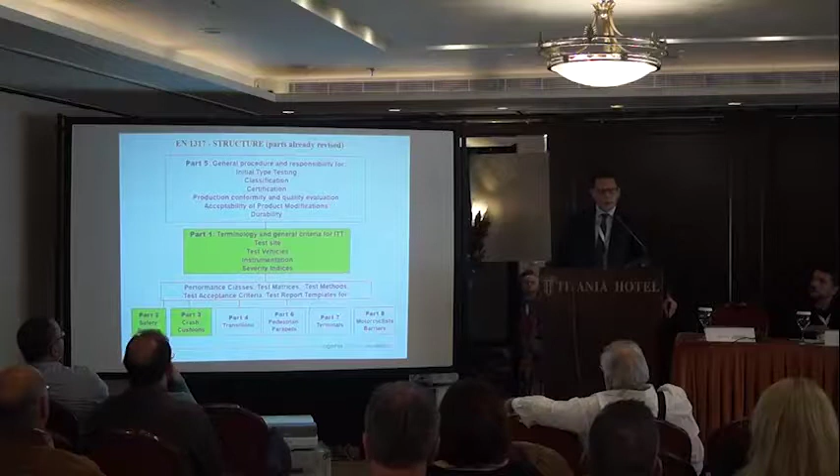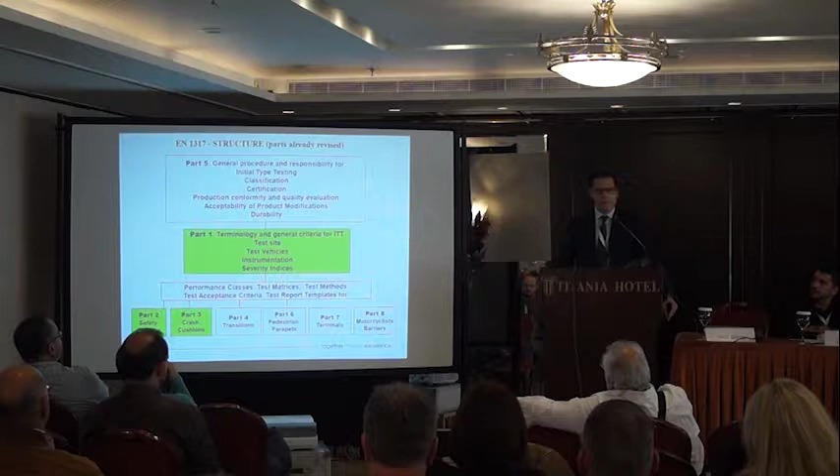While there is still a lot of road hardware not covered by CE certification, even when the standard is present, we keep working to define and improve the standard for a good assessment method. Products such as transitions, terminals, and motorcycle protection systems are still under the umbrella of national homologation.

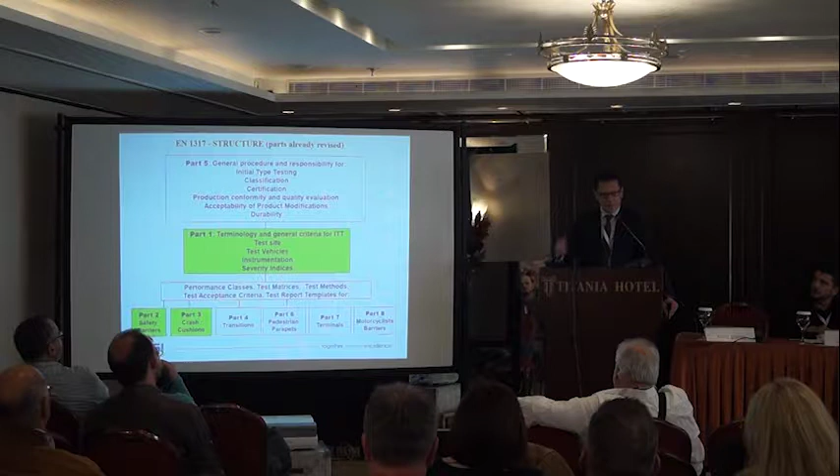It's the national authority that keeps the reference standard, for example EN 1317, to release its own homologation. This is very important: we, in a test laboratory, can assess the product, but not always assess the real crash scenario, which is a different part of road safety engineering.

When we deal with testing, we basically take measurements from the execution of a testing method. That means making sure we have a repeatable and reproducible way of assessing such parameters. So what are the types of vehicle and scenario that we deal with?

According to the classes of the barrier we need to evaluate, we deal with different types of vehicle. A road or side barrier always needs to be tested with two types of crashes. One is TB11 with a 900 kilogram car, meant to evaluate mainly the severity indices - what could be the injury in case of an impact for the occupant of the car, fitting in the car compartment. Then, in respect to the level of containment of the barrier, there's a second test meant to evaluate the barrier's capability to redirect and contain the vehicle.

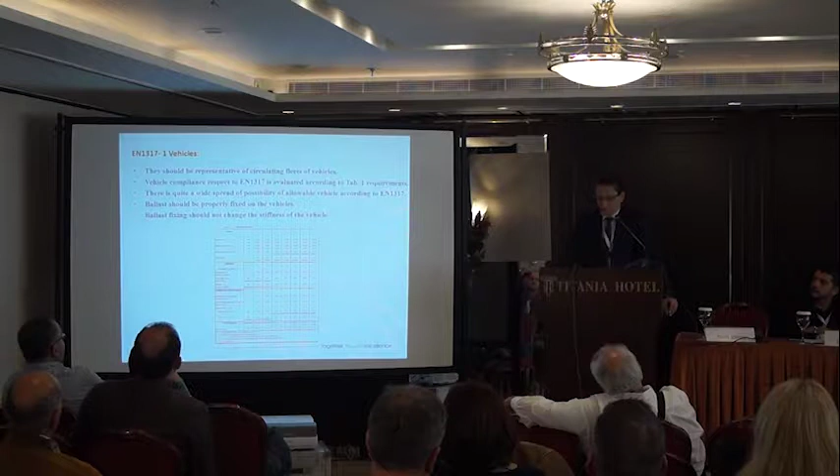This is the so-called high energy impact, done with another type of car, heavier and with more energy, in case of N2, going up through trucks, buses, and articulated trucks, up to the H4 classes, with H4B classes using a 38 ton truck. These are pretty much the types of vehicle involved.

The first one is always present in the test, while the others are differentially used for the different classes of vehicle. It's really important to tell you that the standard we're using is not yet perfect, so you can imagine there's quite a big variety of vehicle that can be employed in our testing standard, and this somehow may affect the result of the test itself.

Nowadays, we believe we have a good compromise between the cost efficiency of this test and the reliability, repeatability, and reproducibility of the measurements we provide. But there is definitely still room for improvement. This is the reason why we keep working in our CEN committee.

What I've just said doesn't deal only with the vehicle selection itself, but also with the way of preparing the vehicle. You can imagine in a test like the last one we saw, the TB81, when you have about 20 tons of ballast provided on the vehicle, the way you secure the ballast to the vehicle may affect both the stiffness of the structure itself and the vehicle dynamics.

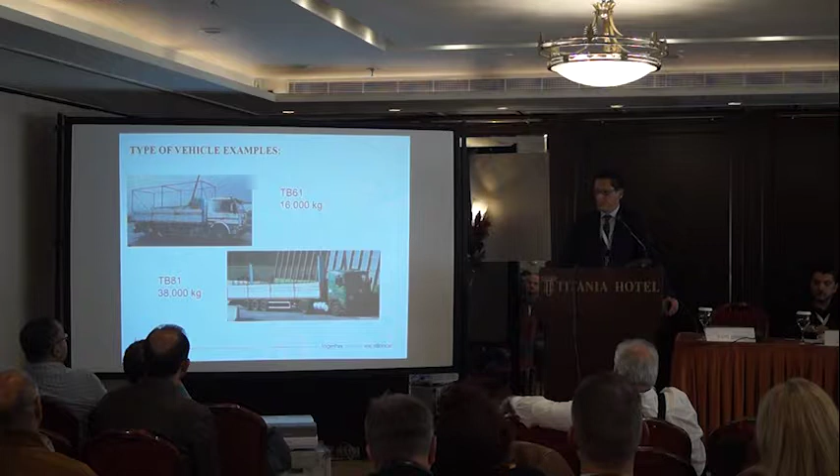This may also have some slight effect on the performance of the barrier itself. These are types of influences and parameters that we are more and more addressing, also with the help of additional tools such as numerical simulation. So we're getting more and more confidence and knowledge about the effect of the different parameters.

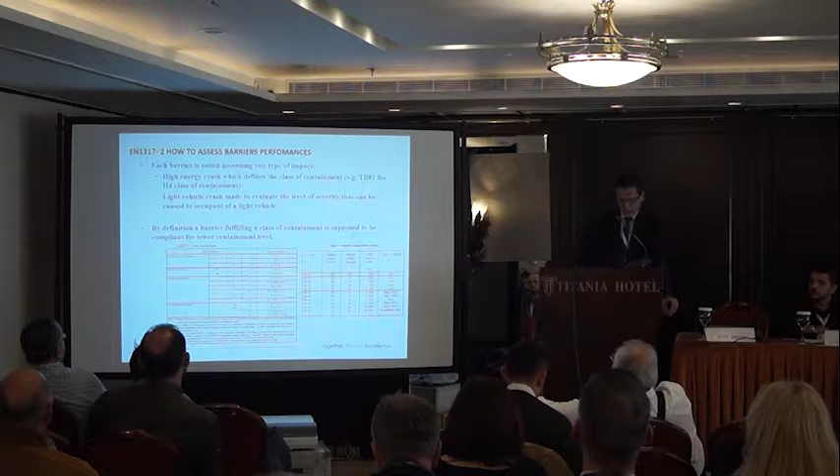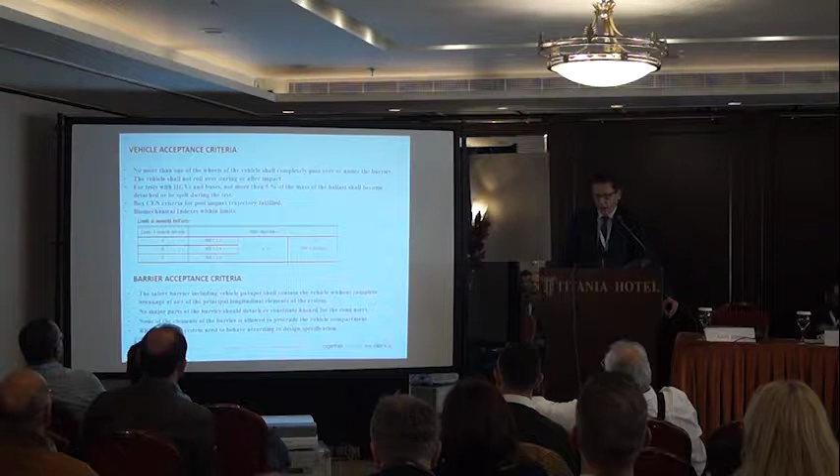As I said before, every barrier is tested with at least two types of impact in regard to the class it belongs to. When we were saying before what are the severity indices parameters that we collect with the car, relating to the injury value of the occupant, we need to clarify that we are not fitting into the car any anthropomorphic test device sensor, as we do in other types of testing, for example vehicle crash testing.

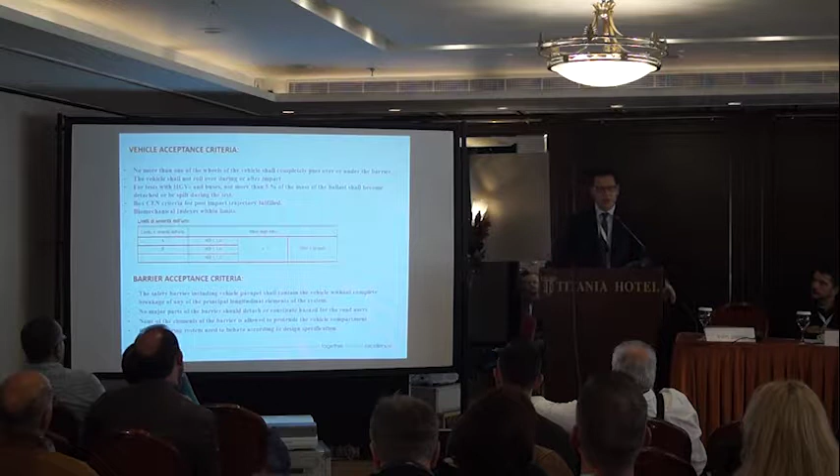Here we have a much more essential numerical model that simplifies the occupant, evaluating the kinematics of this ideal occupant by means of the acceleration and angular velocity read at the center of gravity of the vehicle.

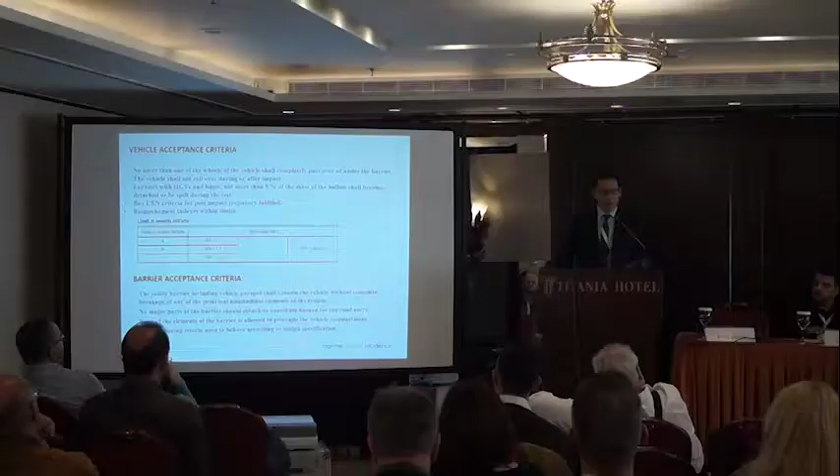This is one of the well-known approximations and assumptions we use when evaluating ASI, which is an acceleration parameter, and THIV, the theoretical head impact velocity, which is the theoretical velocity at which the theoretical model head impacts the inner part of the vehicle body. So it has nothing to do with the real capability of a vehicle to restrain the body and mitigate the forces coming into the human body. But we believe that for this type of application, this is still the best way of having an indicator that allows products to be compared without excessive complexity. So nowadays, this is the best option we have. We'll see what happens in the future, but for now this is really important to point out.

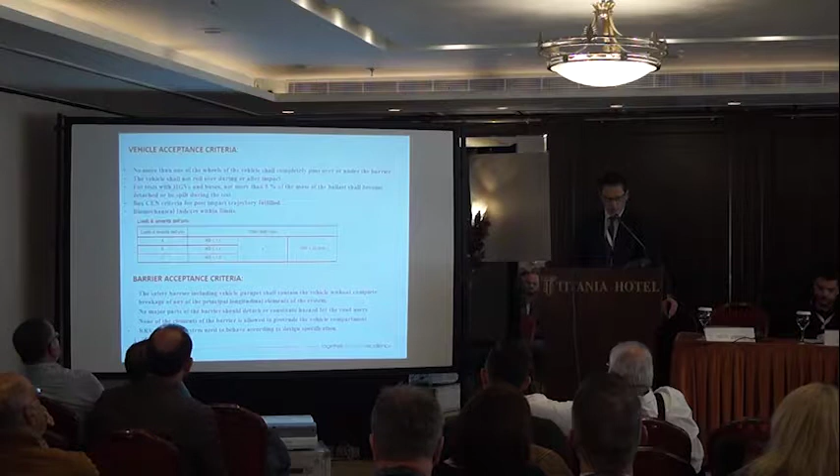When we run a crash test, besides these parameters, we also need to assess the proper behavior of the barrier itself while interacting with the vehicle. It should safely redirect the vehicle, should not break it, and should not let the vehicle protrude during redirection. We also have numerical parameters to evaluate on the barrier dealing with the geometrical and dynamic deformation of the vehicle and barrier, and the maximum displacement, working dynamic deflection. There's also a parameter for the maximum displacement of the vehicle while working on the barrier, in order to select the proper installation point relative to obstacles that may be present around it.

This is just a quick look at how we run tests at CSI. We have built a remote control system that allows us to very flexibly remotely drive any type of vehicle. We have different impact areas so we can impact the barrier.

Oops, wow. Excuse me, I was trying to use this.

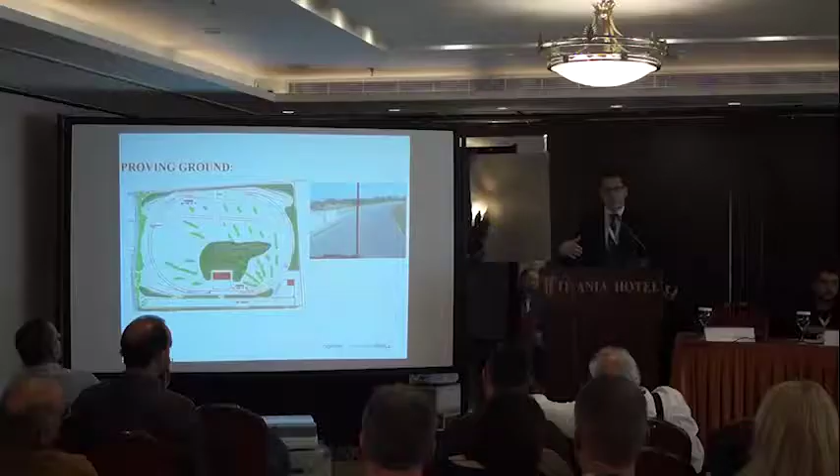We have many impact areas - one here, one here, one here - where we can install 110 meters of barrier in order to test safety barriers. We can test terminals here, and we can test crash cushions on different types of foundation - soil, asphalt, concrete. With this procedure, since we are not pulling the vehicle but driving it wherever we like, we are very flexible in running tests under different conditions and impact points on the same system, without making new installations. This also allows us to carry out research activity, changing the direction and impact point quite flexibly.

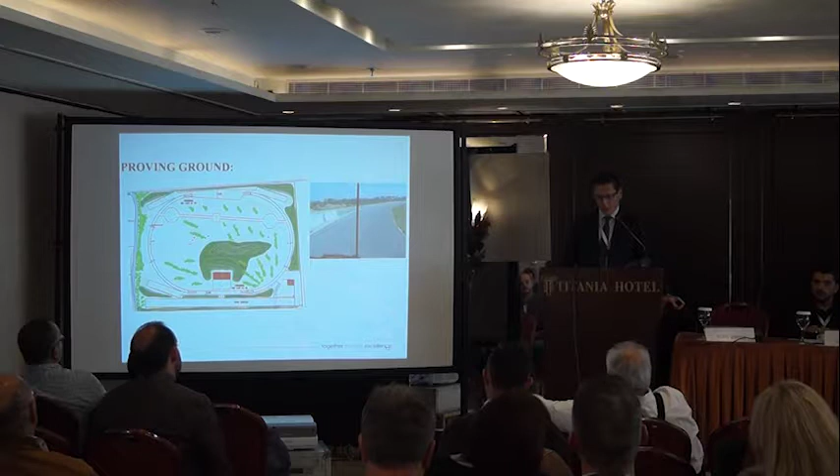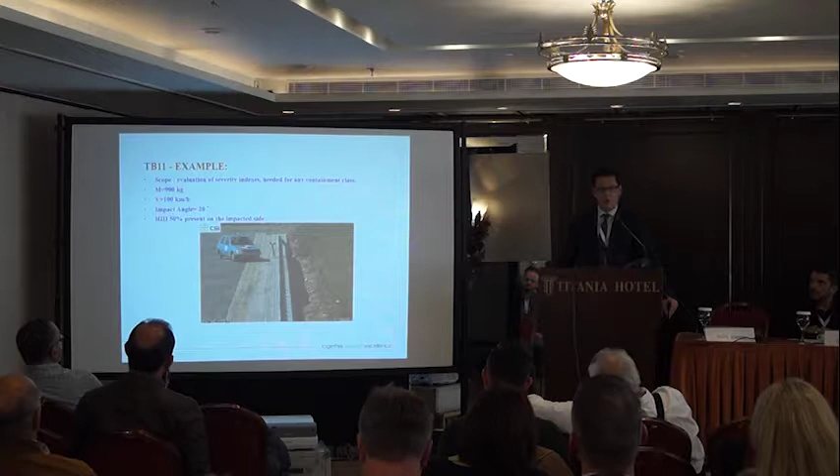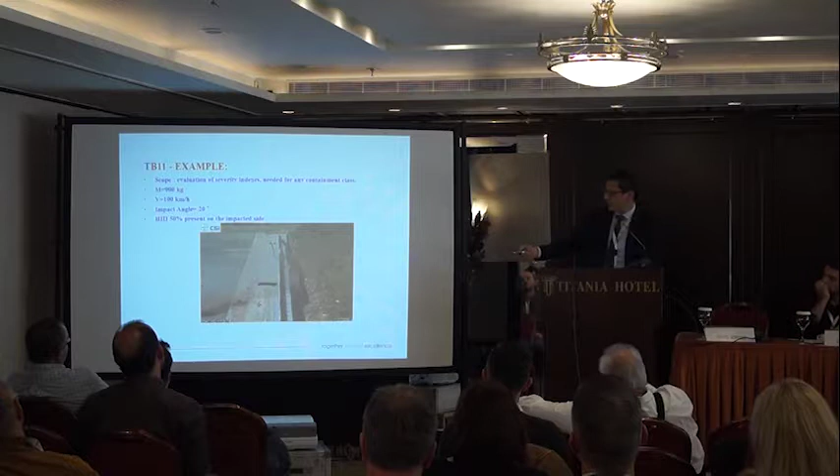As you can see here, we also simulate the free space behind the deck, in order to make sure there is a proper interaction between the vehicle and the bridge deck, and the vehicle is free to see the void after the barrier in case of large deformation, let's say.

While this is another type of application, a soil installation for an N2 system. As you can see, this is a typical way of behaving of a barrier with post and rail disconnection. Very smooth redirection of the vehicle into the road. If you have enough working width available, this is a very forgiving system.

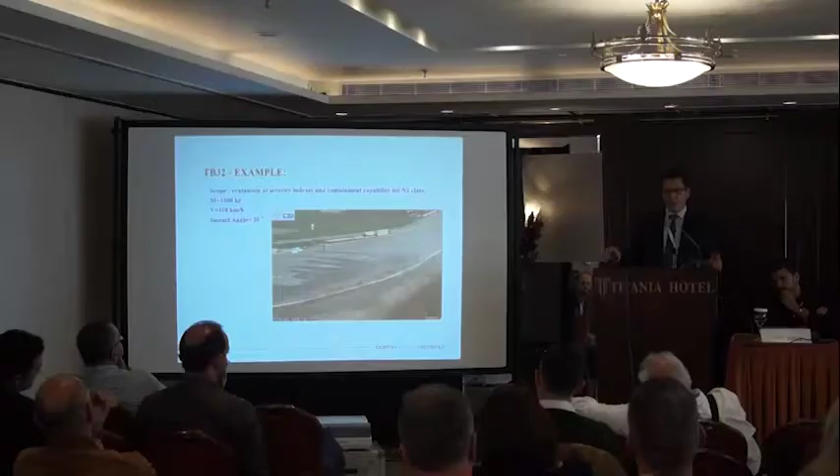When you run testing on this type of system, in regard to the foundation, you need to be very careful about the way you provide the soil characteristics to the barrier, because it's very relevant that the crash laboratory provides to the manufacturer a set of information related to the stiffness of the foundation where the barrier was tested. What we do is assess the product providing a parameter, but this parameter depends on the foundation where the system was tested. So if you take the same system tested on a hard soil, and then install it on a vegetable soil, the performance may be dramatically different.

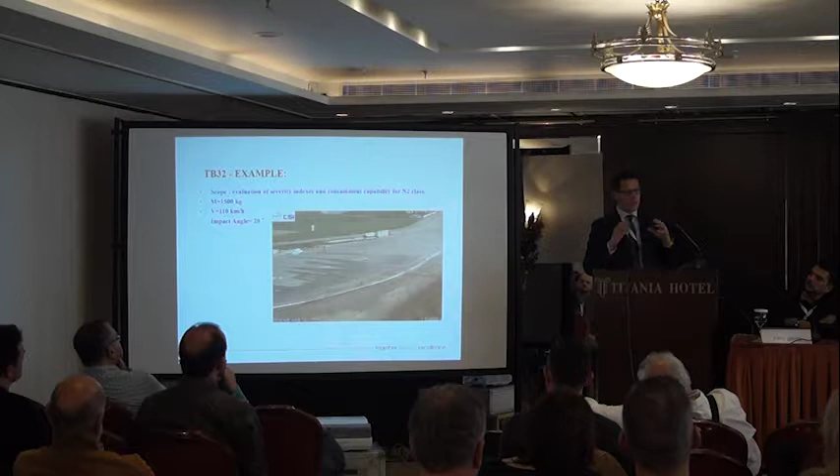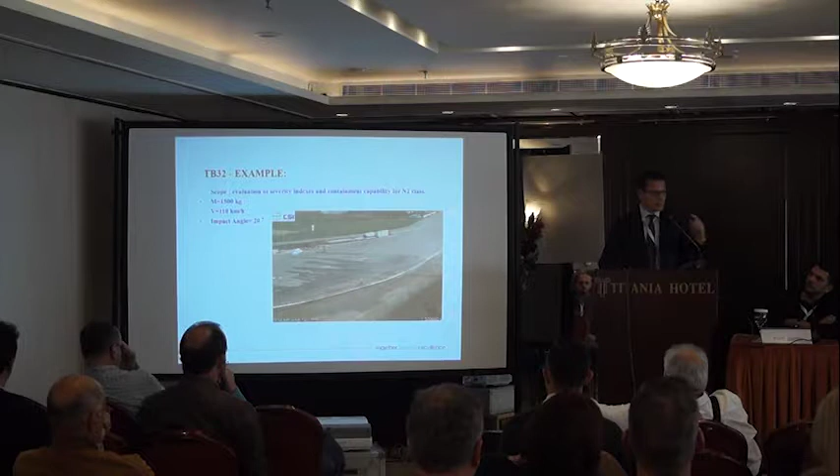So it's very relevant that when the manufacturer gets to the real road and works on a project, they provide information about the performance related to the proper condition where this parameter was measured, in order to make sure you can have a similar condition on your project itself.

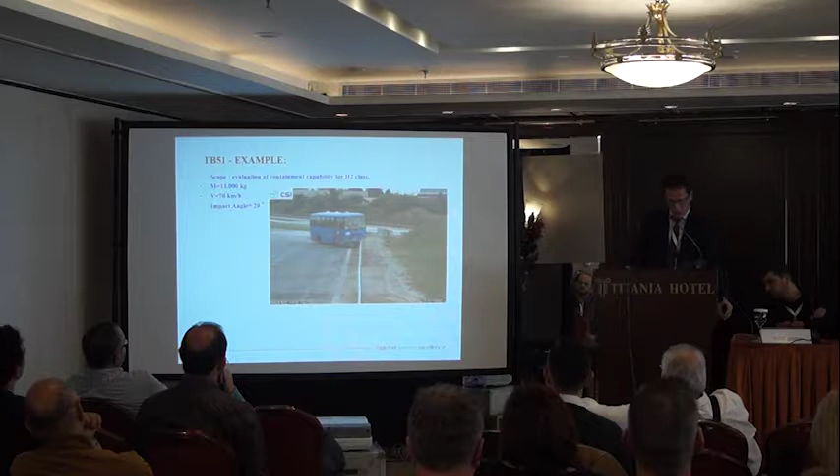So I just wanted to show you a similar test with the bus. Now, as we said before, not always the tests are successful, so this is clearly what the barrier should not do in terms of containment.

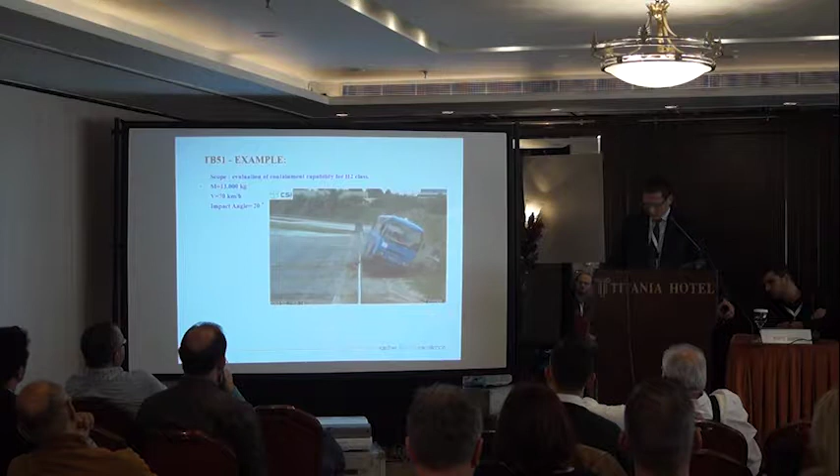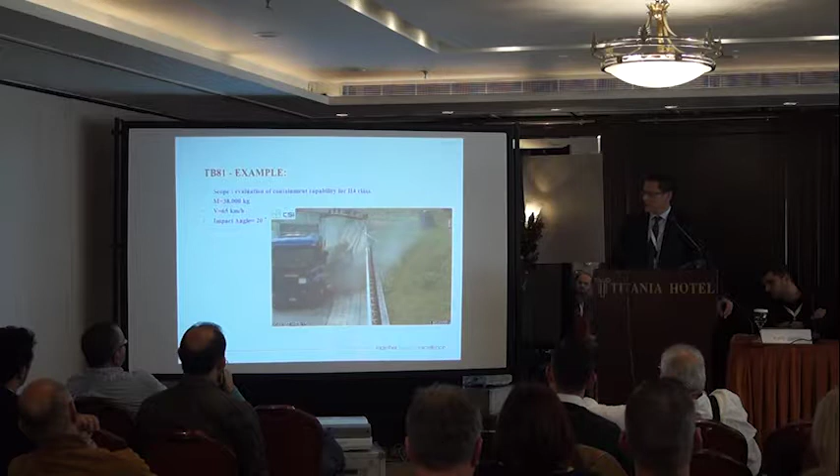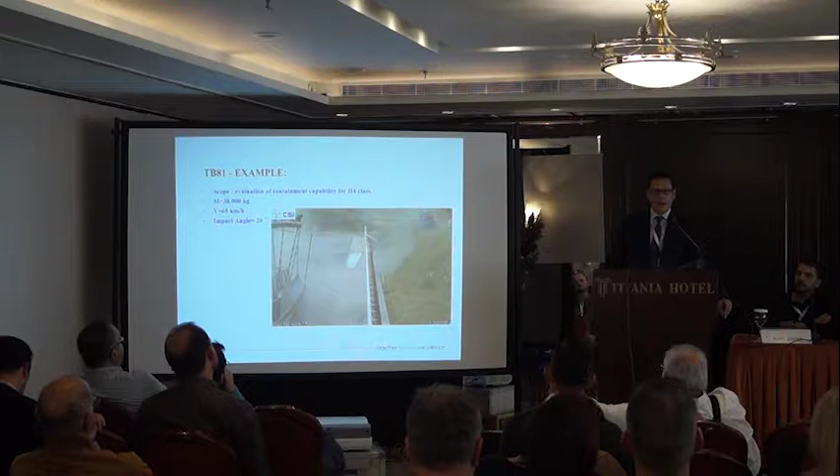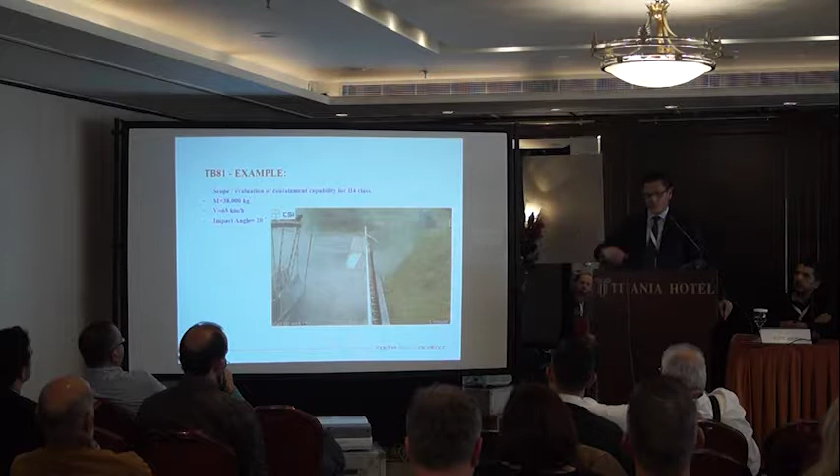And the last example I have related to side barrier testing is an H4B type of testing, which is the maximum level of energy we test according to EN 1317. Actually, as an exercise, 3 years ago we made a so-called H5 type of test, with a 44 ton vehicle at 75 kilometers per hour. We ran it in CSI because it was quite easy to do with this technology.

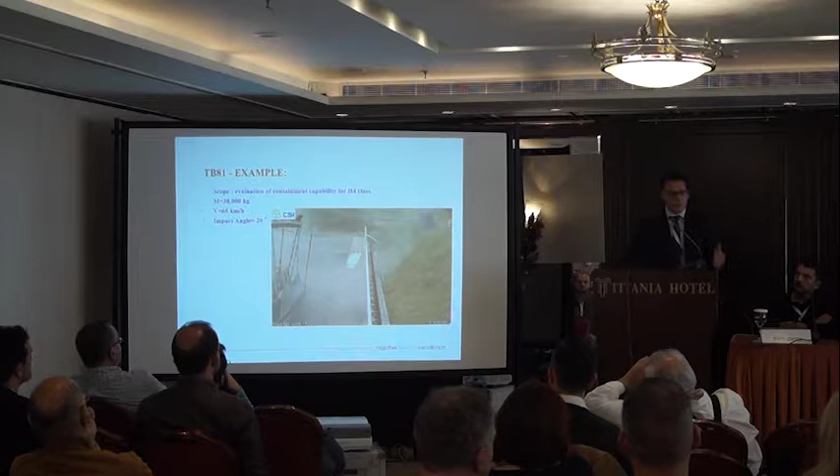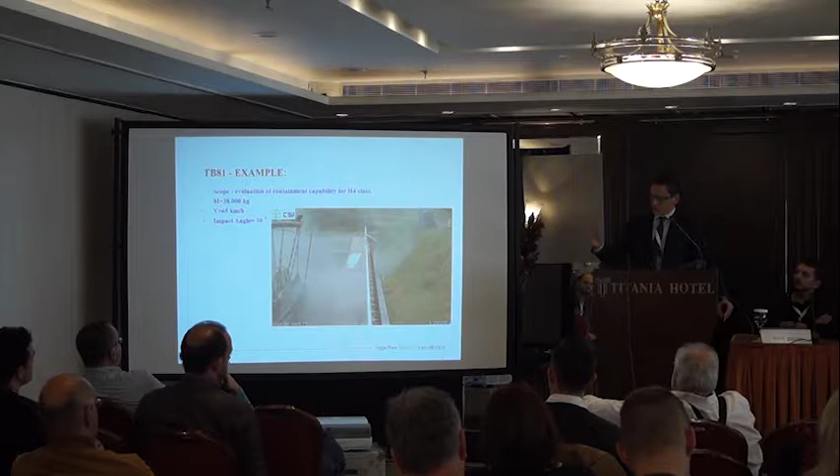The first feeling we had is that the type of system, even stiff systems that we currently have for H4, are not still sufficient to keep this type of energy. But this is going to be maybe a future requirement, it's still under evaluation. The need came from the fact that on certain European roads now the trucks become more and more heavy, so 38 tons sometimes is not enough to be representative of what we have on the road.

Again, just a quick overview of what happened for crash cushions. Everybody knows what crash cushions are, which have a big difference with respect to the side barrier because they are meant to absorb energy instead of mainly redirecting the vehicle into the road. So absorbing energy in order to protect obstacles such as piles, poles, payment tolls, okay?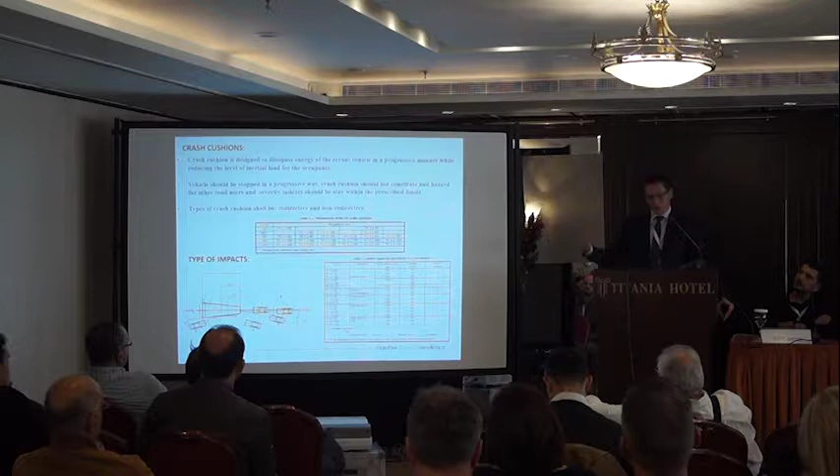Then you test them according to frontal impact with offset, frontal impact centered with an angle, side impact for those that need to be redirective, and also back impact. The back impact mainly is meant to evaluate that in case of upcoming traffic from the opposite side, the crash cushion does not constitute an obstacle.

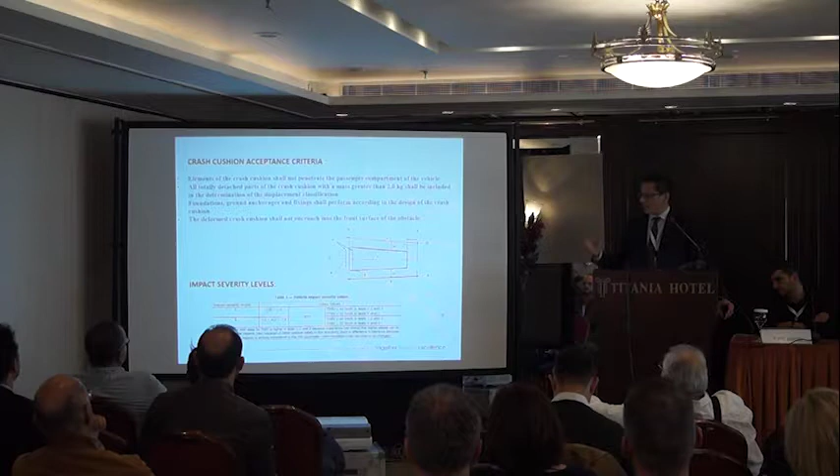Again, even here we have similar parameters to evaluate the behavior of the system that should not constitute a hazard, needs to have a proper foundation according to design specification. And again, you also evaluate parameters related to the severity indexes on the occupant of the vehicle.

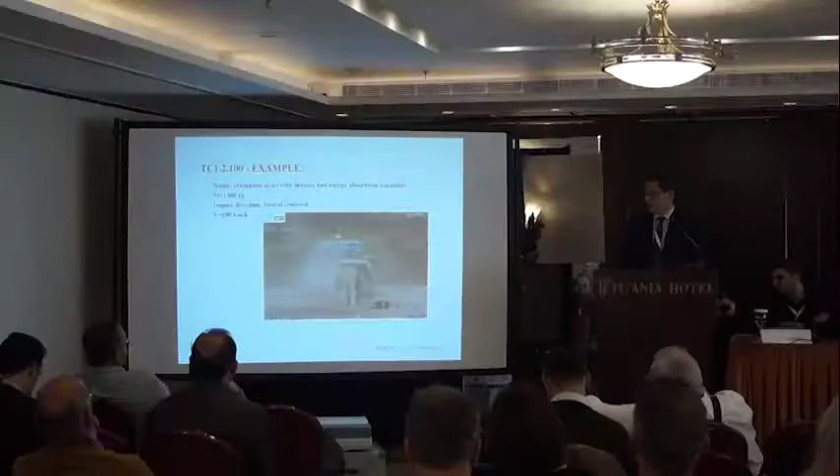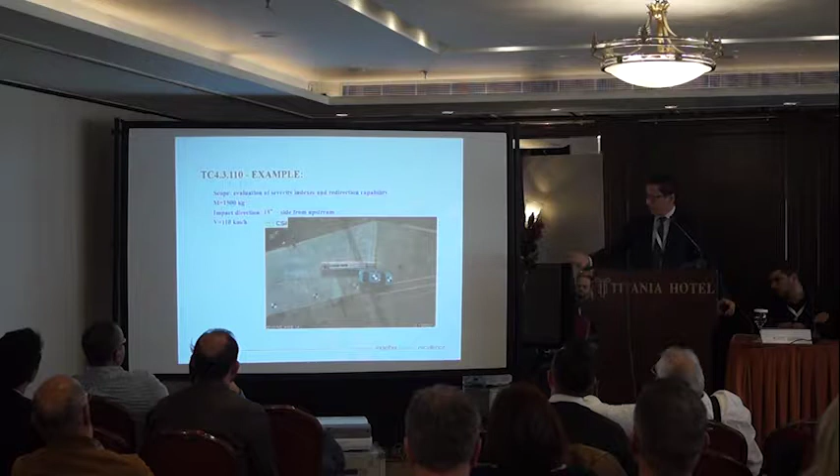So we were saying absorbing energy, this is what I meant for absorbing energy. The vehicle is stopped, and in this way the system provides a crash-worthy force on the vehicle. So you need to have space in order to mitigate the deceleration and stop the vehicle, while saving the life of the occupant of the car and protecting the obstacle that lies behind the crash cushion itself. And as we said, they work for protecting frontal crashes, but they also are supposed to redirect the car in case of lateral impact.

So, provided that this is what we do in terms of testing, very briefly, let's say what comes next in terms of certification process.

In terms of certification process, in regard to side barrier and crash cushion, as we said before, we can currently provide CE certification to the product, since we have a harmonized standard, and because we have been notified by one of the ministries of the European Union.

This means that the job we do in terms of notified body is to run the factory production control and audits to the manufacturer, in order to make sure that they have a quality system in place and they produce the system with the sufficient level of quality, and they are capable to keep the performance of the system while they are producing it.

The type of performance they need to ensure are the performance shown during the crash test, the initial type testing report, which are definitely correlated with the material analysis - the qualification of the material employed into the product - that are very relevant and need to be kept along the complete life and production cycle of the system.

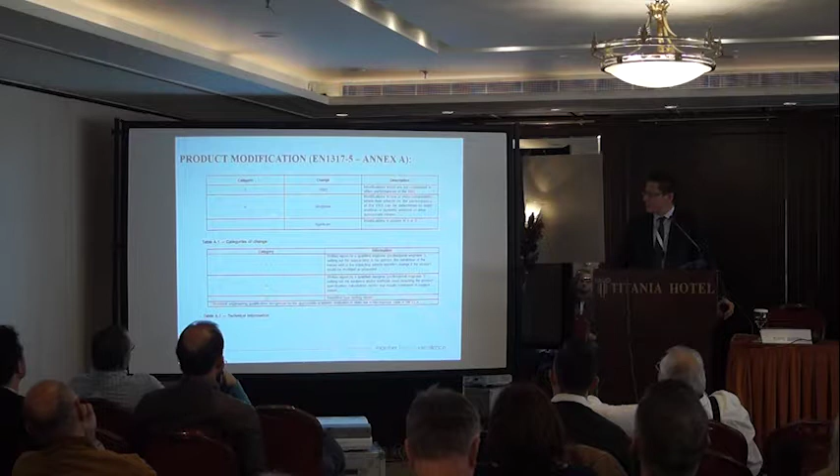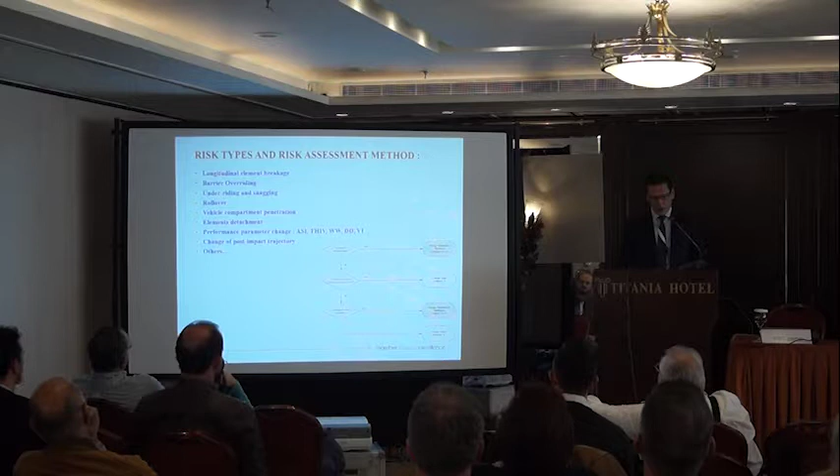We basically evaluate three categories of modification for the product, which are A, B, and C modification. And according to the level of modification, we need to have different assessment of the impact of this modification on the product performance.

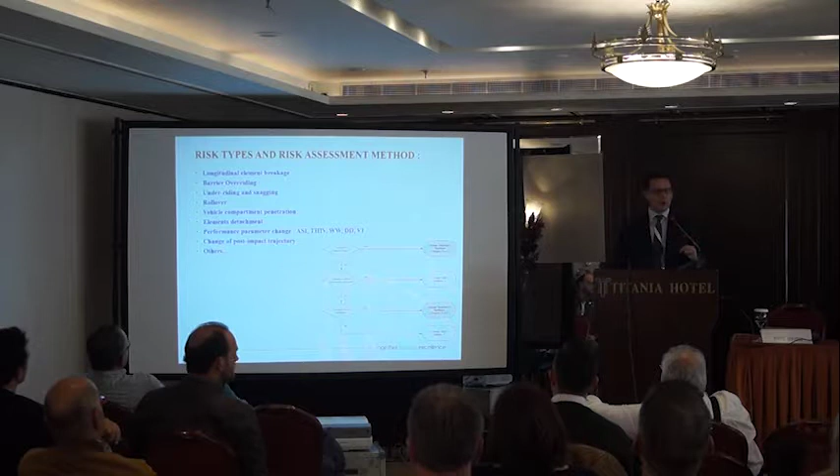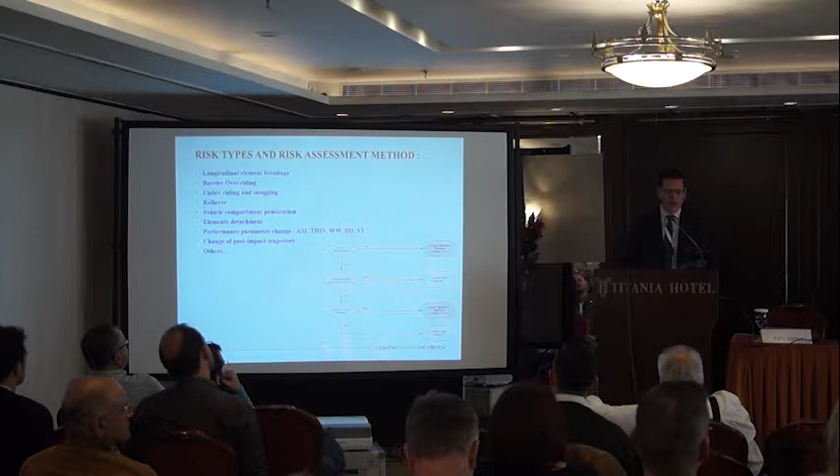What is really important to keep in mind when we evaluate a product modification is that the main goal is to prove the constancy of the performance. Because if the performance changes in terms of working width, dynamic deflection, biomechanical index, this becomes another product. So when we evaluate a product modification, our task is to make sure that the performance are kept constant.

So we can evaluate three types of modification in order to have different types of assessment. For type A modification, which is a very simple modification, we will simply have a description of the modification, because after we run a risk assessment, we evaluate that the modification has so small an impact that it does not require a deep dive on the evaluation.

While if you have type B modification, you will need to have partial testing, or it is also allowed in EN 1317 to run evaluation with numerical assessment, only for type B modification. And it has to be done very carefully, because the numerical simulation needs to be treated only if...

...the designer can prove that the model is very well correlated, and the notified body can treat it only if he has the competence to evaluate the numerical simulation. In EN 1317 we specify how to provide proof of proper correlation of a numerical model, and this applies only to type B modification.

So when the modification is considered, after a risk assessment, to be significantly relevant but not crucial for the change of performance of the product - because in case the modification is considered to be at a high level of relevancy, it becomes a type C modification, and a full vehicle crash test is mandatory at that time.

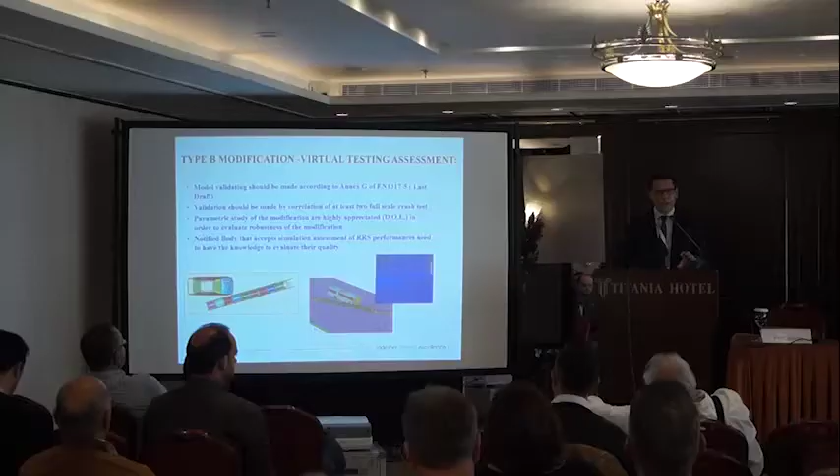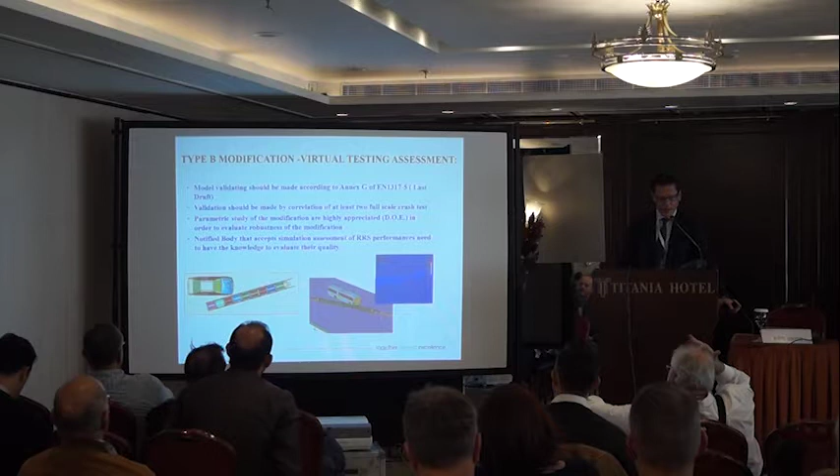So the model needs to be validated, and in the working group we have in CEN TC226, we have a specific working group that deals with numerical analysis, and they have provided a continuously improving, and currently I would say good, set of specifications and methodology to evaluate the accuracy of the numerical model. So in EN 1317 Part 5, it is currently defined how to assess a numerical model.

So very basically, when you assess the modification of a product, you have the crash test for that product.

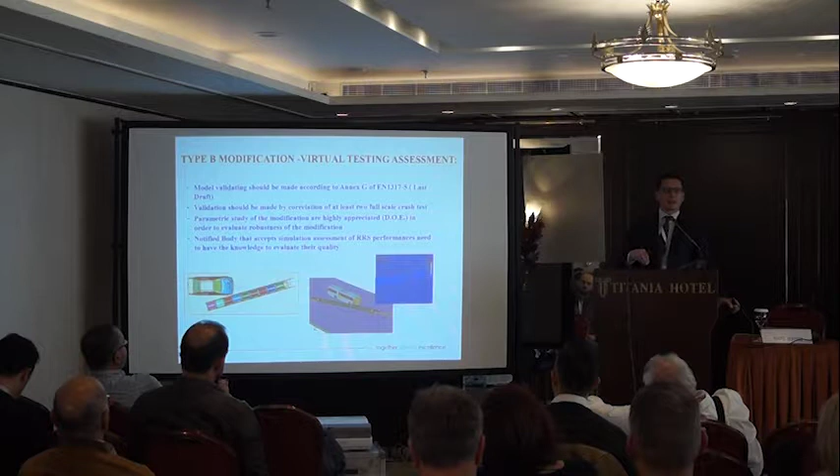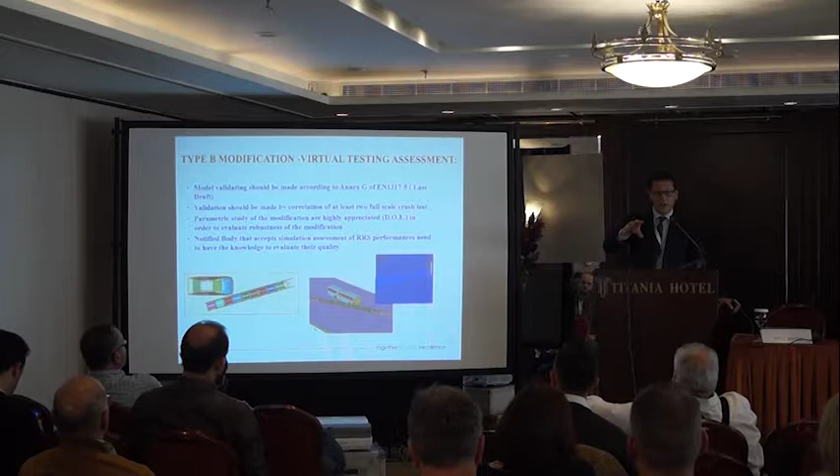So, first step is that the numerical simulation needs to be capable to reproduce the same result that the crash tests have shown. From that moment on, you can work with that model to evaluate the modification itself.

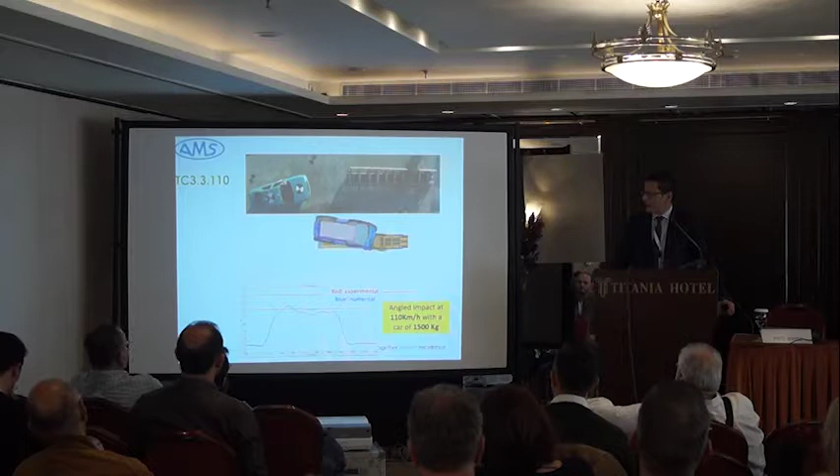Currently, the technology we have with the finite element method is quite accurate, but the phenomena we evaluate are highly nonlinear and dynamic. The system may have a specific behavior, so it needs to be very carefully evaluated.

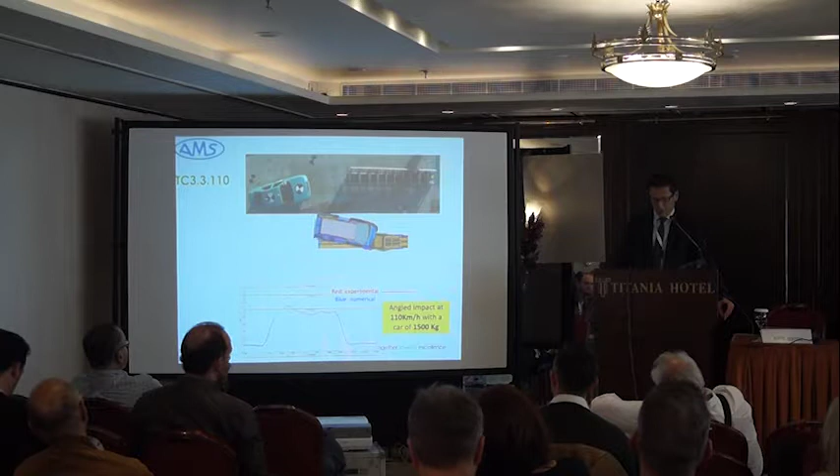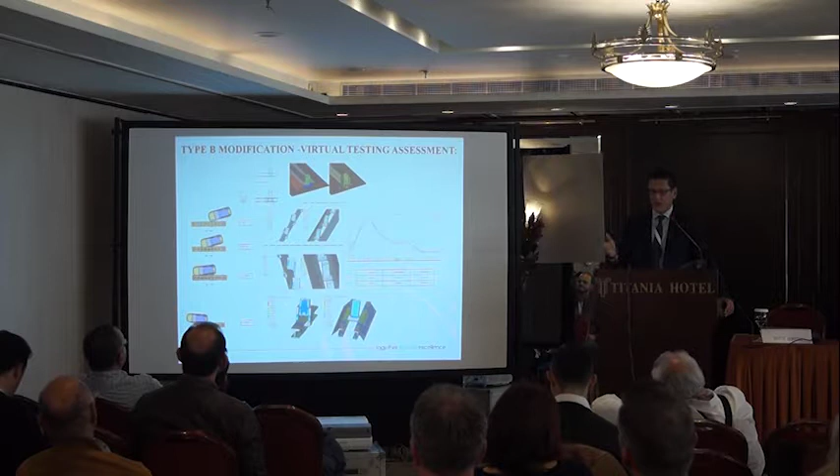The numerical simulation is also very helpful for evaluating the modification, or running assessments in terms of parameter change. So as soon as the modification has been proved to keep the constancy of performance, the new modified product can be included in the family of products that have been granted with the CE certificate.

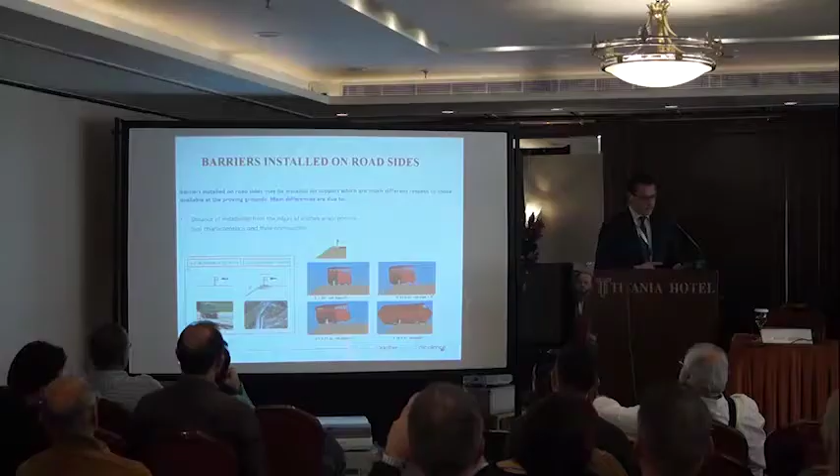Let me be very brief with the last topic I have for today, which deals with installation. We apply EN1317 as a standard to evaluate the performance, but we - the road designer, the barrier manufacturer, the authority, the ministry - need to be very careful that the system has been tested in a condition relevant to what you install on the road.

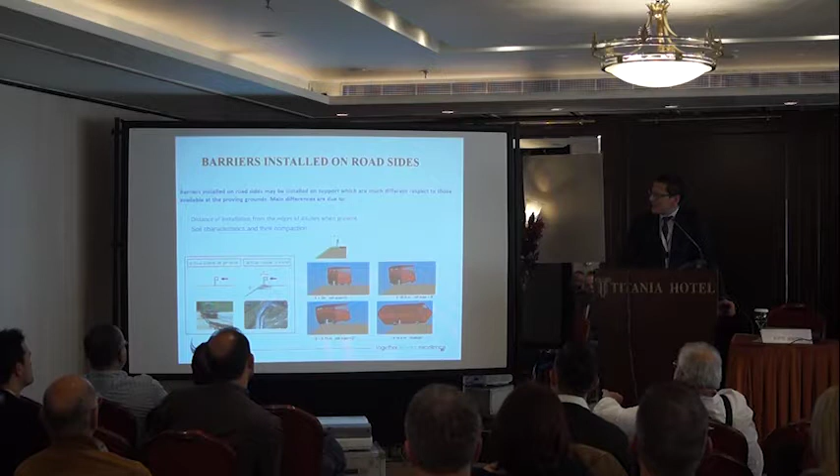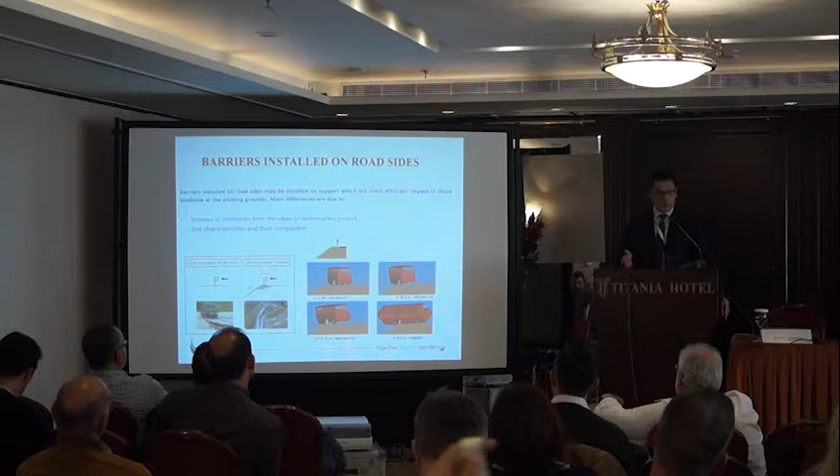Let's take a look at what happens for the installation of a barrier on soil, and what may be the main differences compared to the crash test. Basically, the main differences between a barrier installed on the proving ground and on the road are the distance of the installation from the edge of a ditch, in case the ditch is present, and the soil characteristics in terms of compaction.

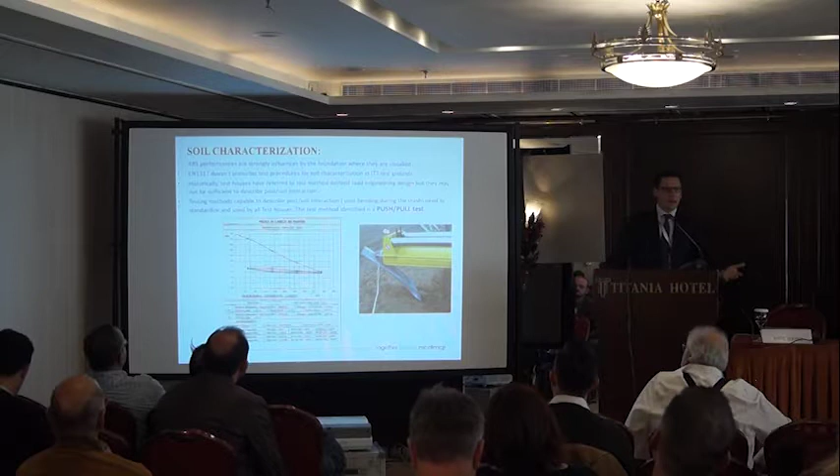How do we assess the compaction of the soil? This has been a long-treated argument, and I believe we've now come to a reasonable conclusion. Until a few years ago, we had been defining the soil characteristics in a way very similar to what the road designer does. This doesn't pay off very much when you have to assess the behavior of a beam that is dynamically bending in a volume of soil. So we had to conceive a new way of assessing the performance of the soil.

This means not only evaluating the stiffness, the compaction, but also running dynamic testing, push-pull testing on the post itself. Let me show you what I mean by that.

So this is the type of testing I'm talking about. We have a specific hammer that knocks the post, loading it during its real installation. You can even test a very rigid bar, such as an HEB, a very stiff post like this one, in order to compare the stiffness of different soils using the same post. But you can also test the specific post of your barrier in the same soil, to evaluate how that post behaves in that soil.

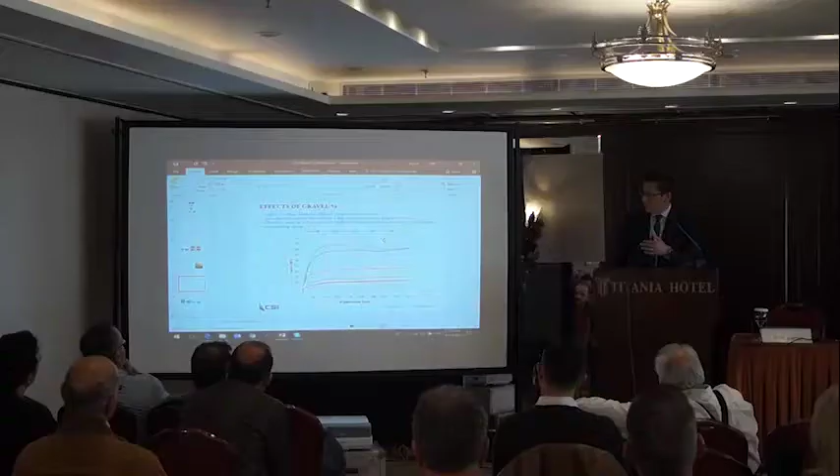So at a certain stage the stiffness drops because, for this type of gravel dimension, you have too many voids in the soil, which reduces the stiffness of the volume itself with respect to the push-pull test.

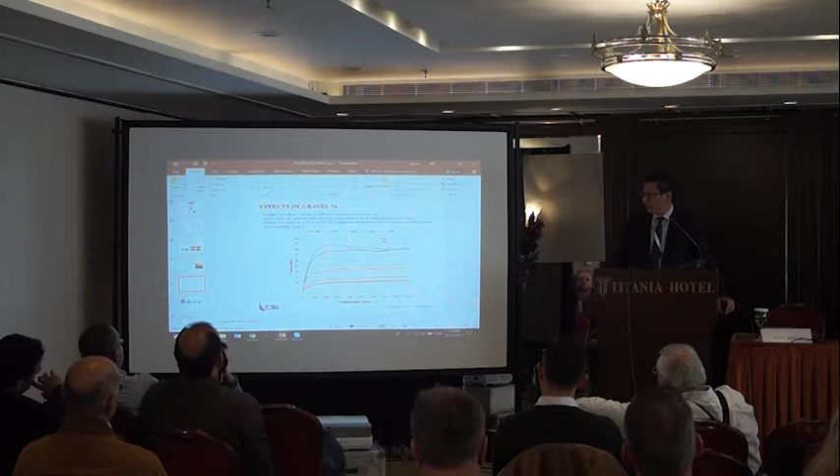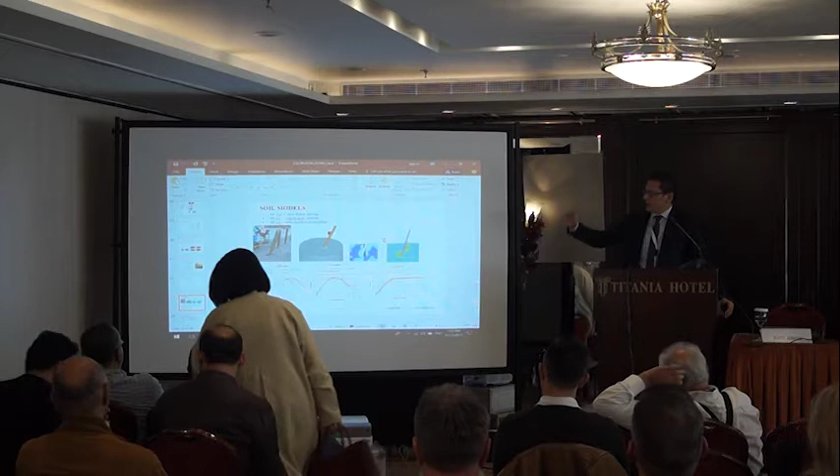There are different models to simulate soil behavior, which is quite complex, that have been recently introduced. Some are numerically more efficient, such as a one-dimensional model using nonlinear springs that keep all the parameters such as moisture, depth of position, and so on. Or you have more complicated three-dimensional models that deal with the soil considered as a solid or as a fluid. So this is simply to say that the level of knowledge with respect to numerical modeling of the soil today is quite high, and we can provide quite good correlation with the push-pull test itself.

So just two slides to the end. What we are going to introduce in the new EN 1317 standard—I'm talking about the draft, because for political reasons it was not yet finalized and voted—but what we expect, after the job we have done, to be included in the next approved standard is the definition of a push-pull test that first of all defines the constitution of the soil itself.

There are going to be four types of foundation defined: standard soil, fine soil, special soil, or paved soil, that need to be defined for that specific initial type test.

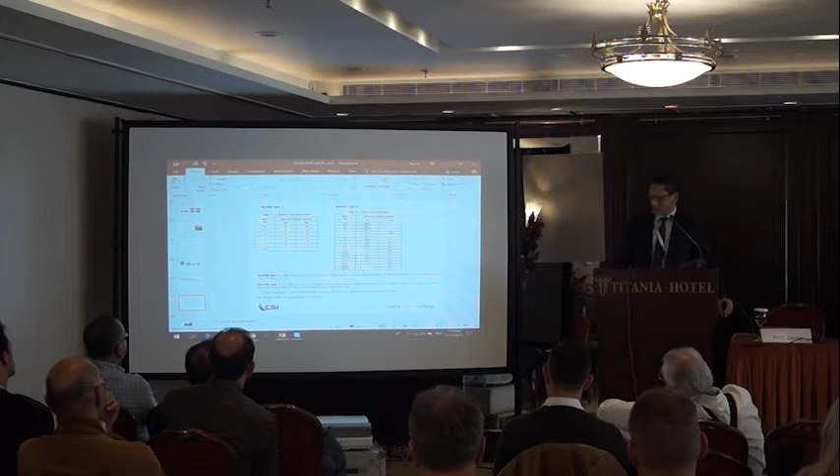The soil in the proving ground needs to be prepared in a standardized fashion. In fact, we prescribe that the soil is compacted in layers of 30 centimeters as soon as you have defined the constitution of the soil itself. This is simply to provide the characteristics in terms of mixture of the different types of soil.

And then you need to run a push-pull test with a stiff beam, as I said before, and acquire the time history of force versus displacement. With this type of plot, you have the best characterization of the stiffness of your foundation.

Together with that, you have the parameter that defines the barrier behavior, and then you can go to the installation asking for similar soil to install the system, in order to ensure that you will have a similar result to what you acquired during the ITT.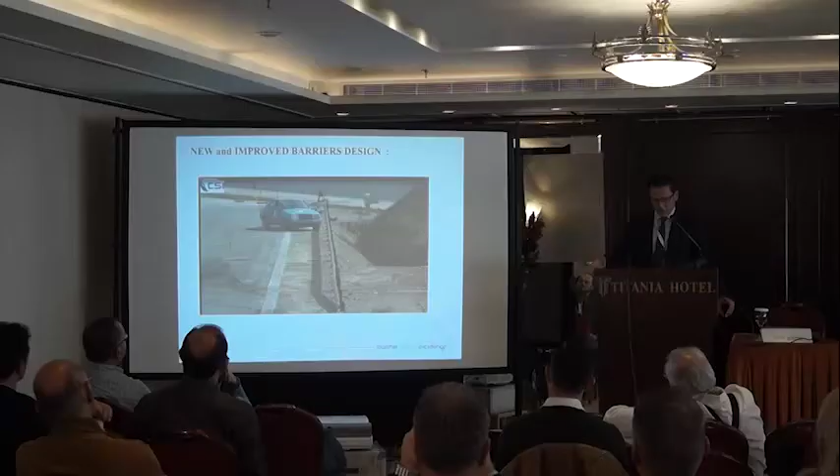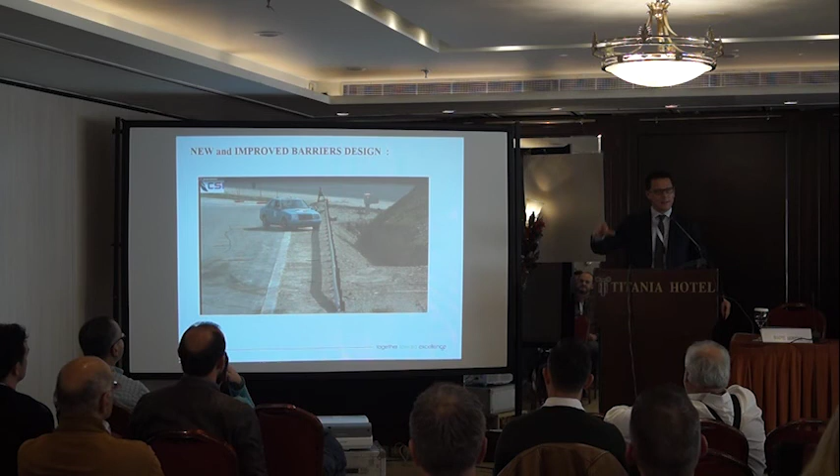Oh, I'm sorry, but I can see it here, and you can't. Let me see if I can show it to you. Okay, anyway, this was relevant in this soil installation evaluation, because it's a very clear explanation of what a manufacturer should do. Thank you very much.